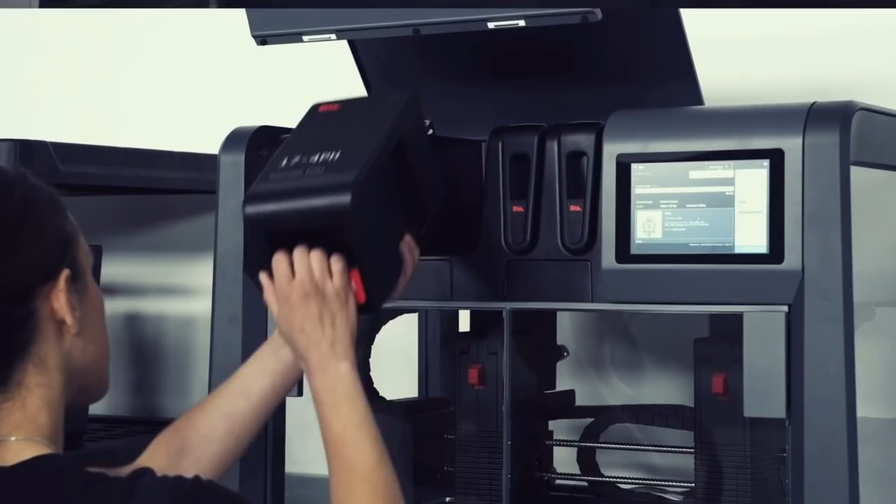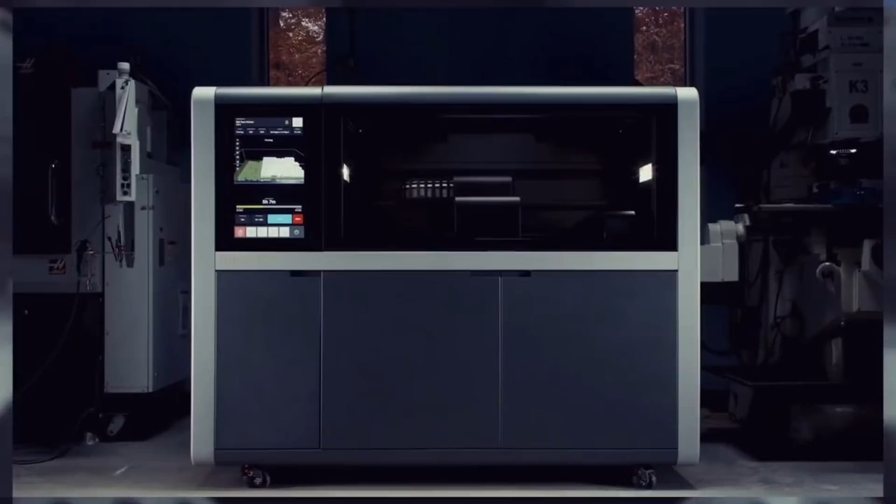In this video, I will be sharing my background research on the metallic 3D printing sector, and then discussing Desktop Metal, a company Chamath Palihapitiya has recently been tweeting about. I want to briefly discuss some of Desktop Metal's main competitors, and put forward some views on why Chamath is backing this stock specifically.

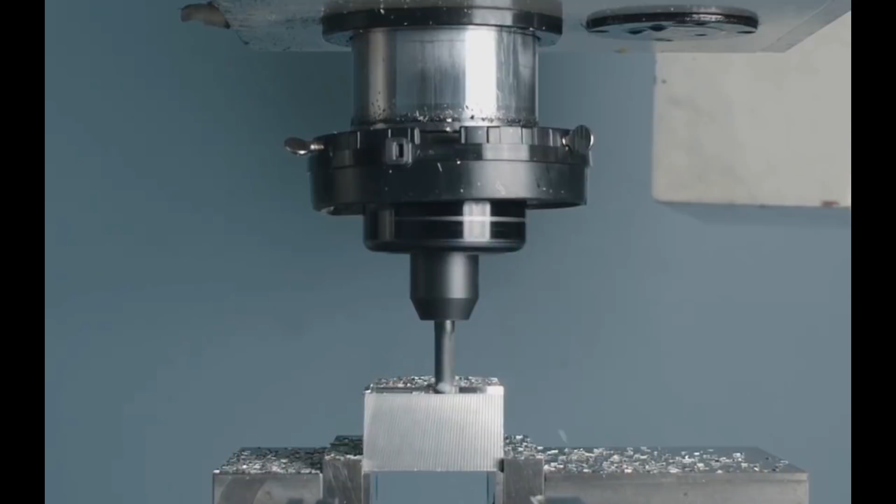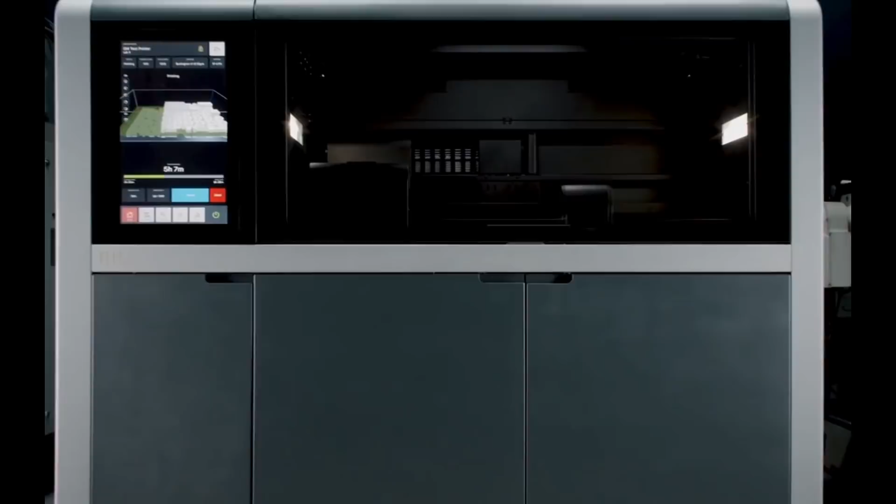Now, I can't understand why this industry isn't being talked about more often. It is pretty clear to me now that we are on the verge of a manufacturing revolution. I think the impact 3D printing will have on the manufacturing sector will be similar in relative scale to the impact electric vehicles are having on the automotive sector.

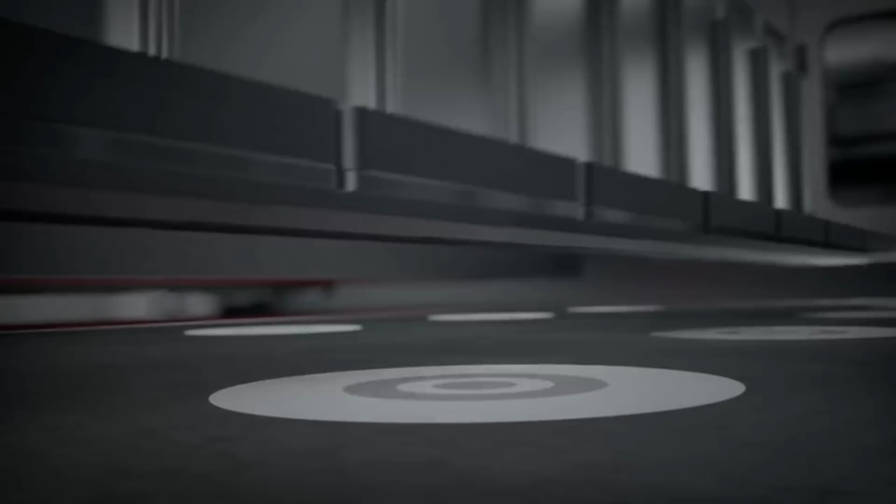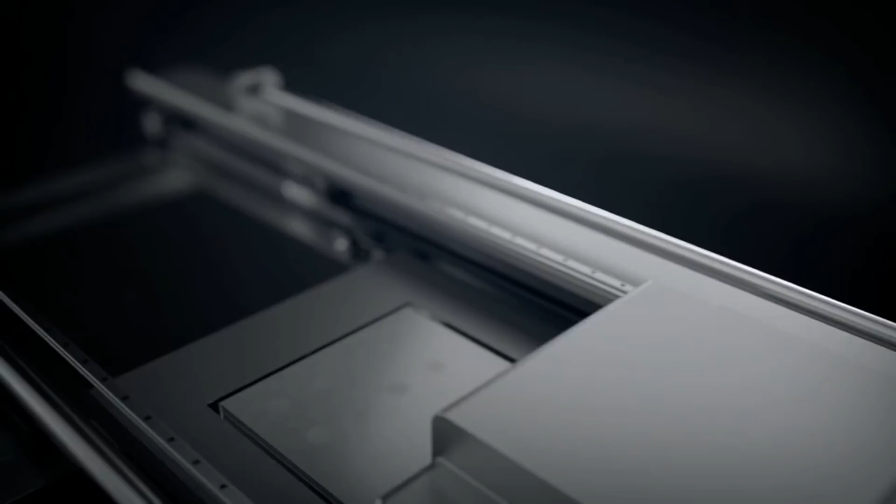The majority of people will have heard of 3D printing, but for those that haven't, 3D printing, or additive manufacturing as it is called in the industry, is the process of constructing an object by depositing material in very thin layers, layer by layer, until the desired shape is formed. The process of additive manufacturing has been around in useful form since the 1980s, and was mainly used for prototyping. Only recently have the machines, or the printers, that produce 3D objects been suitably advanced that additive manufacturing has become a viable option for industry for mass production.

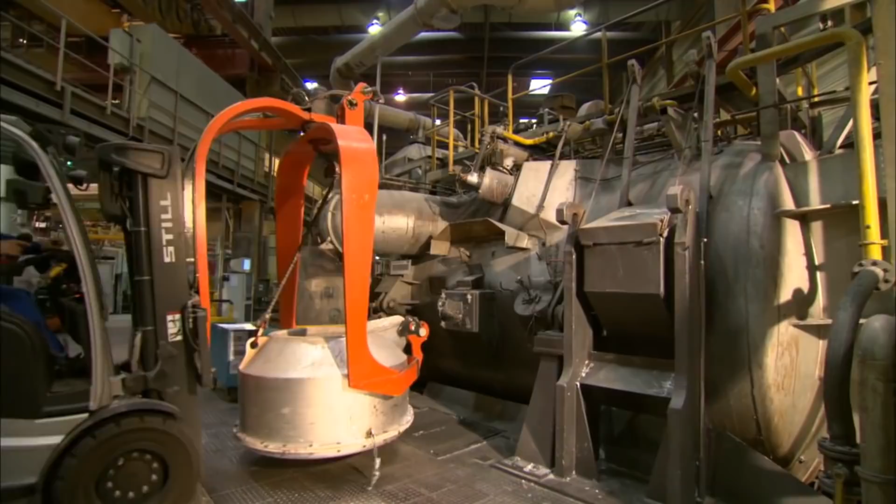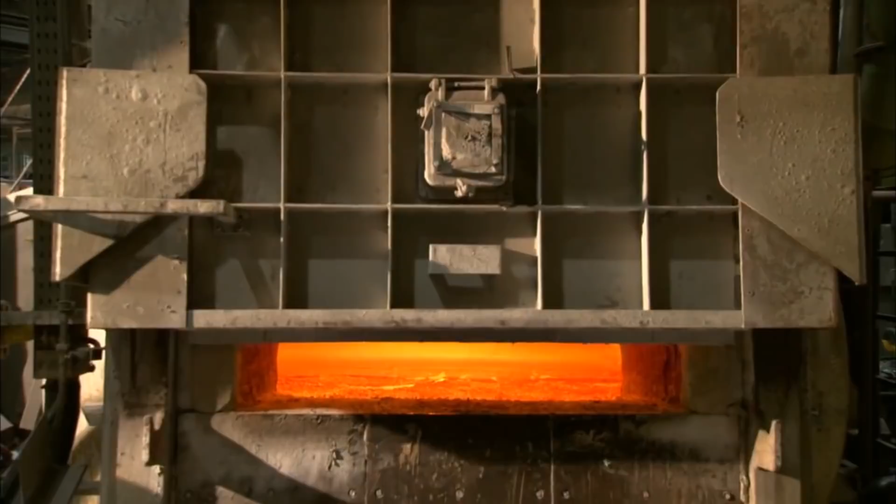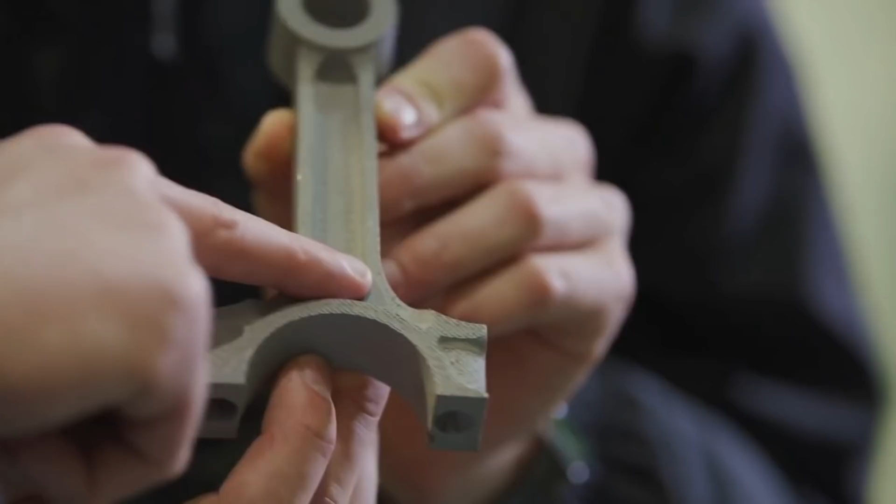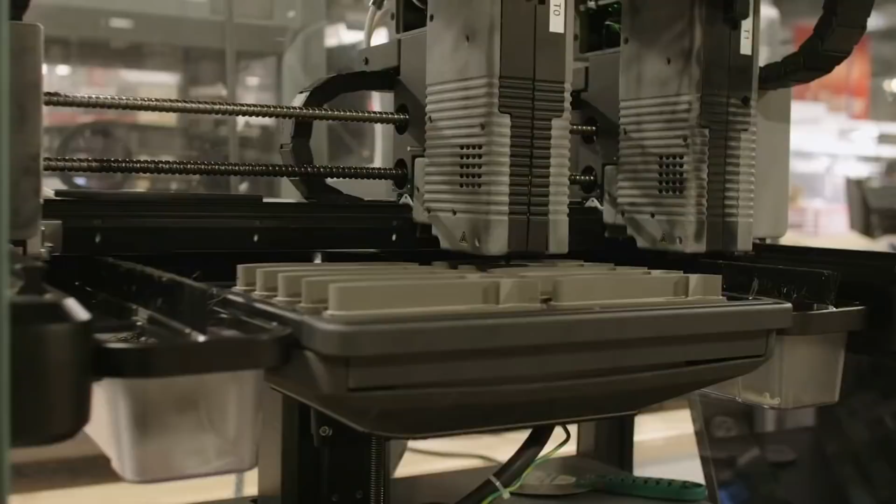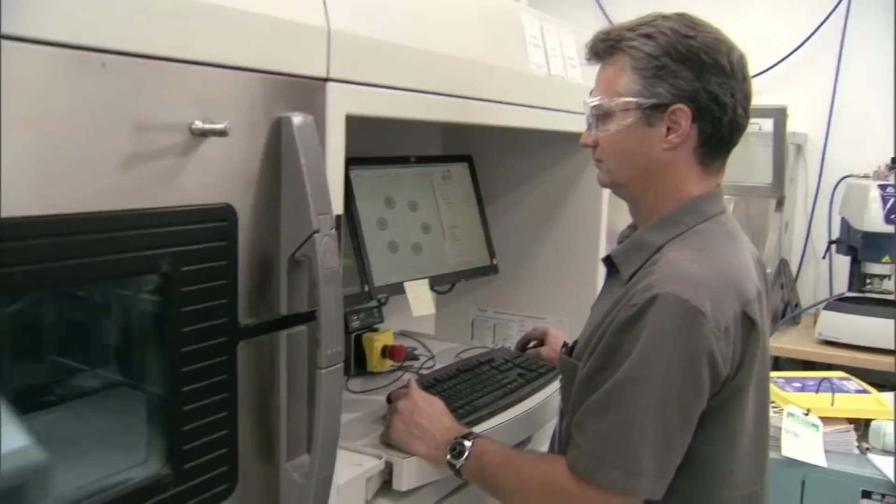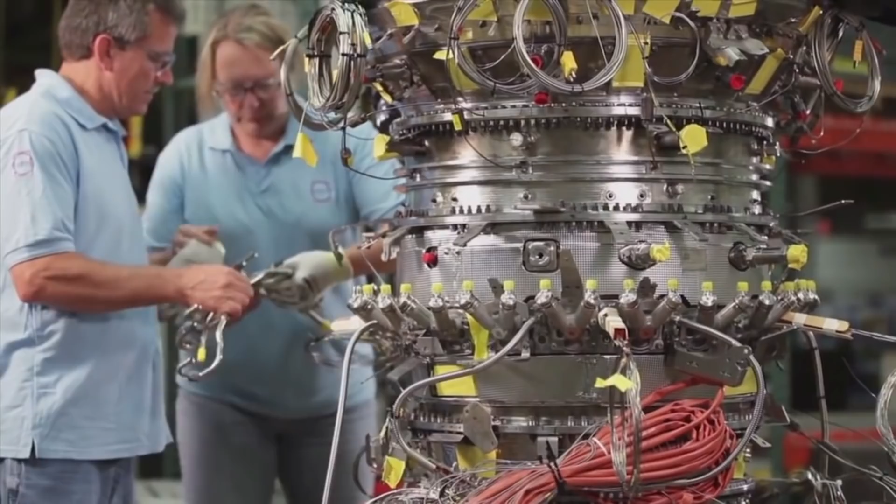This comes in the form of supply chain efficiency by either reducing the number of suppliers or by vertically integrating the suppliers and bringing the process in-house, but it also comes from the ability to combine parts that was previously not possible. A famous example that is widely cited was back in 2016 when GE was able to produce fuel nozzles using additive manufacturing. The process was able to produce the nozzle, reducing the number of parts from 20 down to 1, saving 25% of the weight and reducing the assembly time.

To understand why additive manufacturing is going to revolutionise the industry, it's important to first understand how the parts are currently being made. Simply put, there are two main methods: casting and machining. Casting is where molten metal, usually aluminium, copper, zinc or an alloy, is forced into a steel die or mould that contains a hollow cavity of the desired shape and allowed to cool. The die is then removed and the product is formed. Machining is where you start with a block of metal and cut out the product you want. Machining is often used to shape the moulds used in the casting process.

A key limitation to machining and casting when compared to additive manufacturing is the constraint on the shape that can be made. With machining, a designer is limited to producing a shape that the cutting tool can reach. With casting, the designer is limited again to producing a shape that the molten metal can reach. So a designer needs to consider the manufacturing process when they are producing their designs. A designer may be able to come up with a leaner, more efficient design, but if it can't actually be made, then it's pointless.

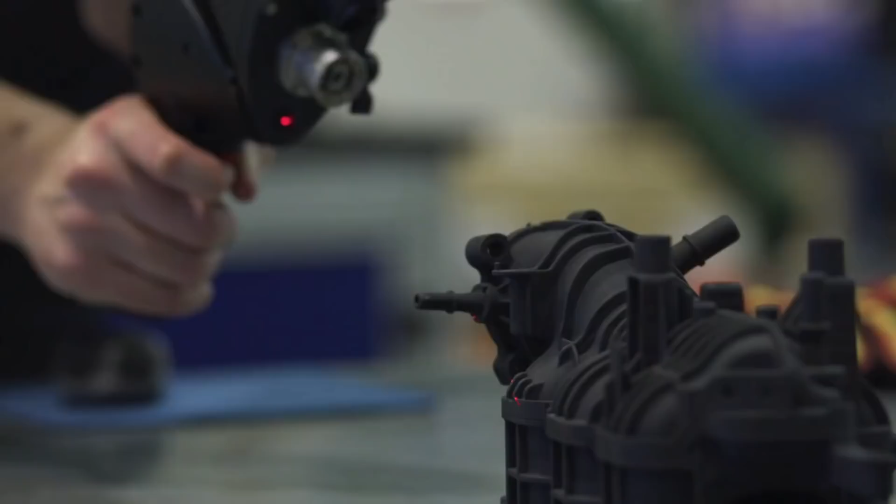So what is so great about additive manufacturing? Well, put simply, it is a transformative approach to industrial production, made possible by the transition from analog to digital processes.

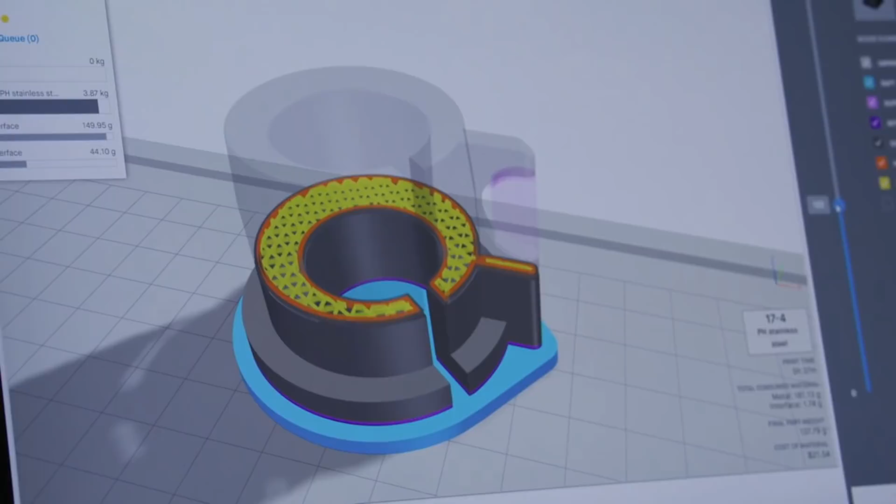It uses computer models to direct hardware, the printer, to deposit material layer upon layer in very accurate shapes. As the name implies, additive manufacturing adds material to build up an object. It is proving to produce cheaper products, provide a more flexible design phase where prototyping and design changing is quicker. It produces a lighter, more lean design and can provide supply chain efficiency.

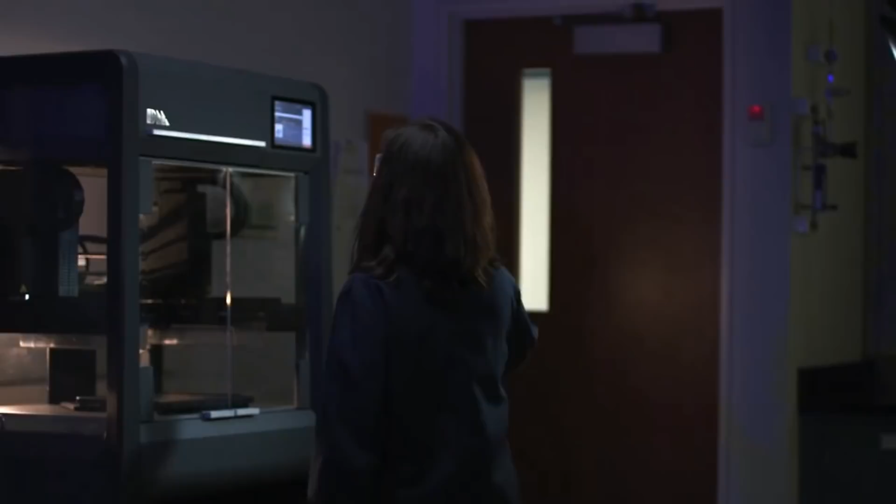Structures can now be produced where material is only deposited where material is needed. Designers are becoming free from the shackles of casting to produce products that were never possible before. And this is one of the main reasons why lighter products are being produced. But another key reason is due to supply chain efficiency.

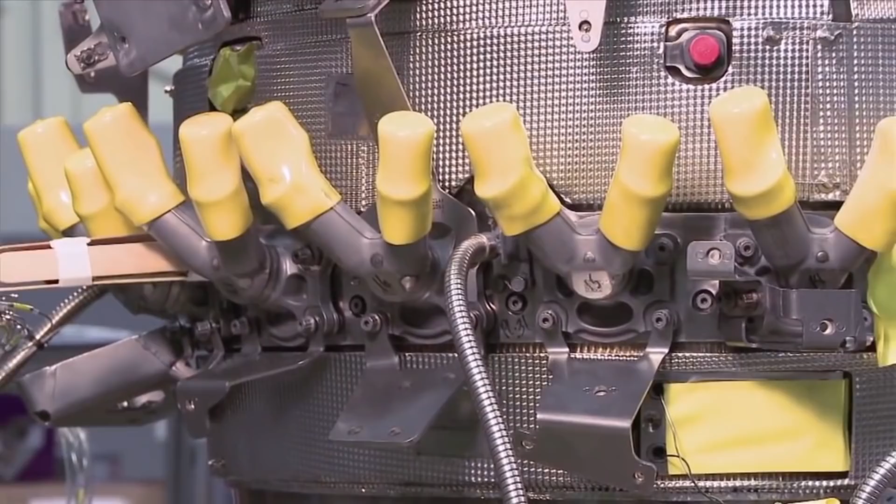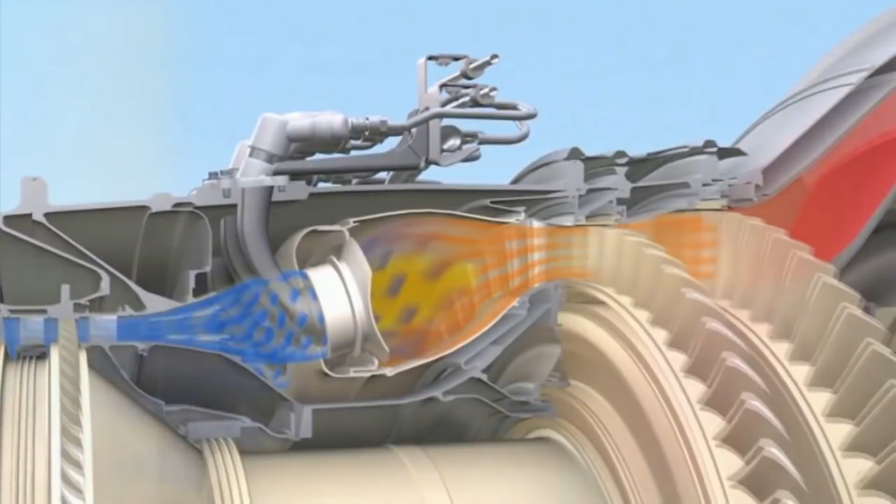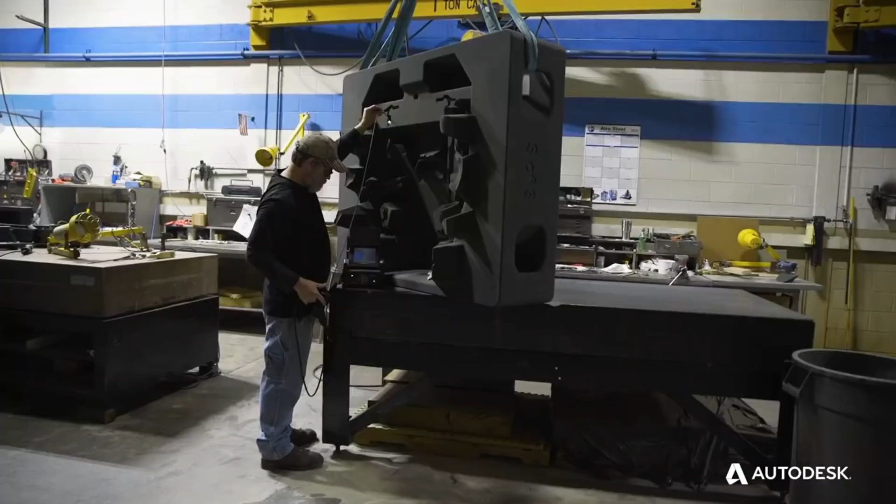The fuel nozzle example mentioned earlier used to require 20 different parts, possibly from different manufacturing companies across the globe. These parts would probably need to travel to another factory to be assembled. To assemble, the part would either be welded or bolted together. All this adds weight, making a product less efficient. 3D printing or additive manufacturing is able to produce these complex shapes in one, reducing the number of connections and thus reducing the weight.

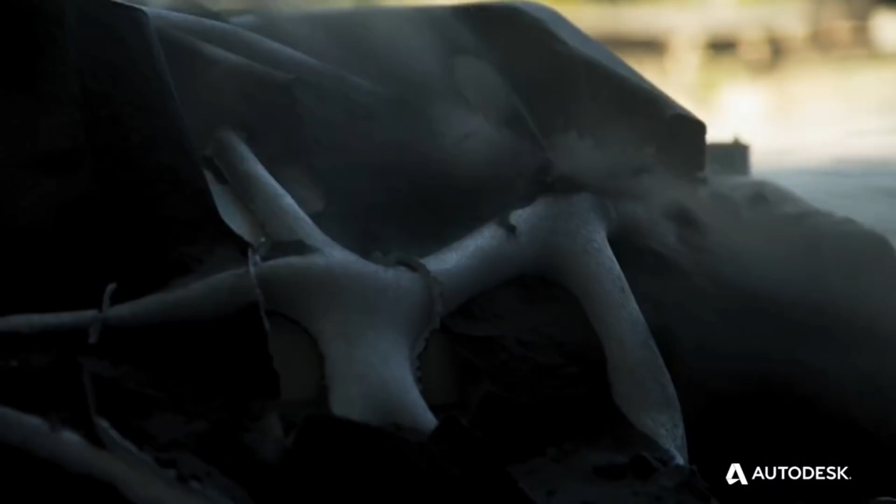And we must now talk about artificial intelligence, because I see this as another key factor for the migration to AM. Artificial intelligence is being integrated into design software packages, further assisting designers in producing designs that are a lot more efficient. It has been suggested that the CAD technicians of tomorrow will be able to produce more efficient designs than the top designers of today, all thanks to AI.

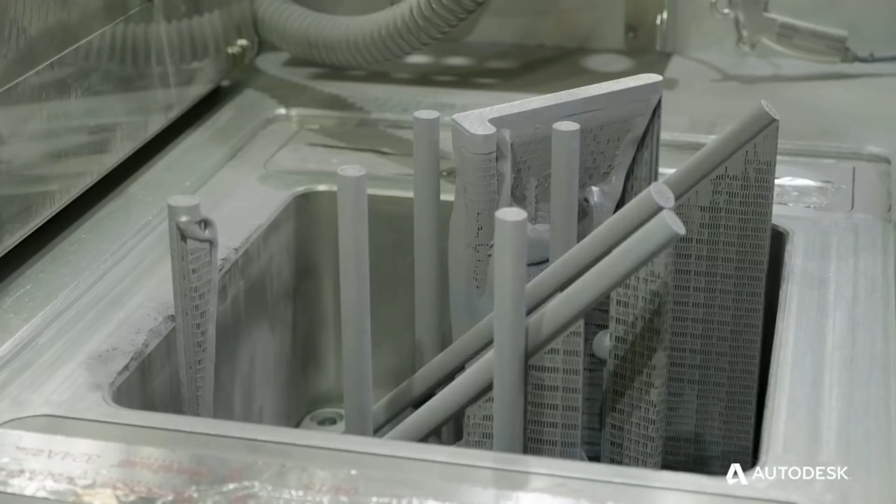We are starting to see products and structures look more like things in nature, like tendons in the human body, and this is because AI is able to determine the most efficient form of a structure, ensuring material is only present where it's needed.

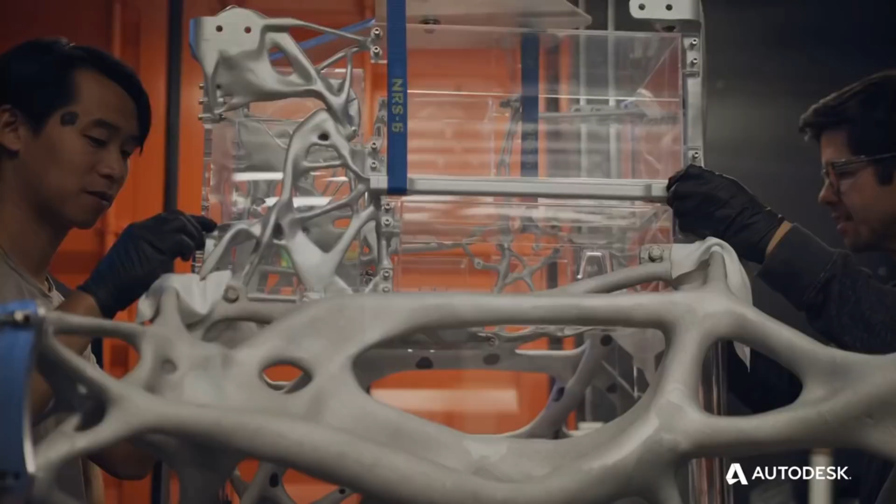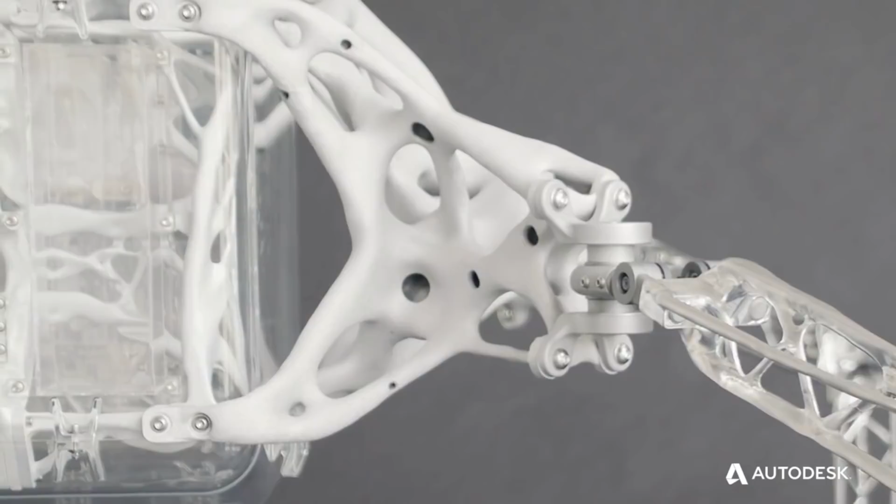Now, it's really important to stress at this point that additive manufacturing isn't going to suddenly make casting and milling redundant. It should be seen as a powerful addition to these existing methods. But as additive manufacturing technology develops, I do believe we will be seeing a significant shift from the traditional methods towards AM.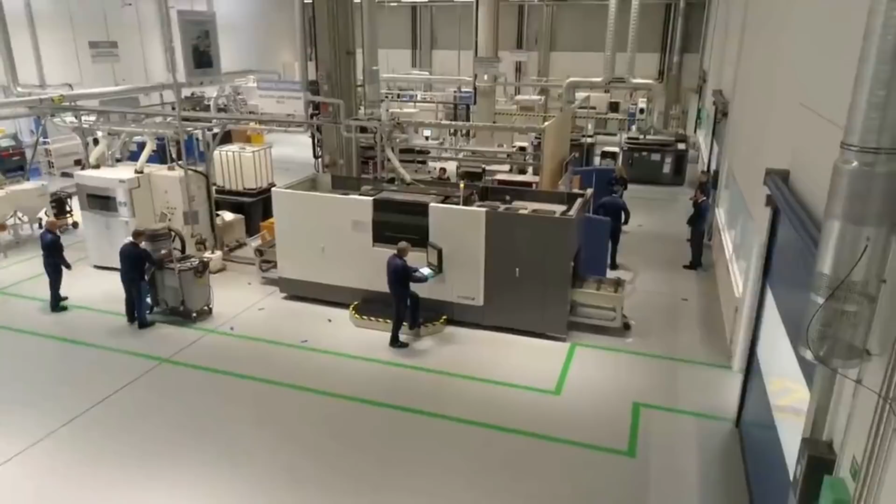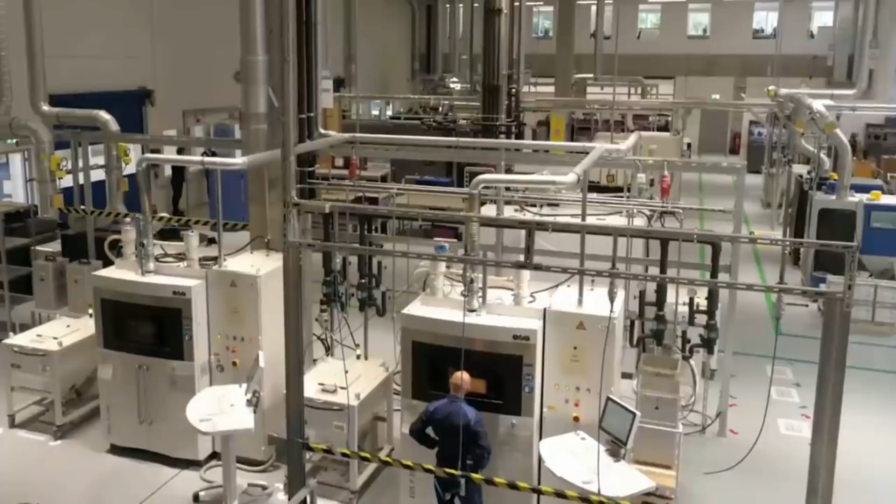Now, there are 7 main types of additive manufacturing methods, and I think it's important to briefly discuss them, as it won't become apparent why Desktop Metal's products are superior if you have nothing to compare them to. The 7 types are laser powder bed fusion, material extrusion, binder jetting, directed energy deposition, material jetting, sheet lamination, and vat polymerization. I only really want to go into detail on the first 3 of these, as they are generally the main ones in the industry.

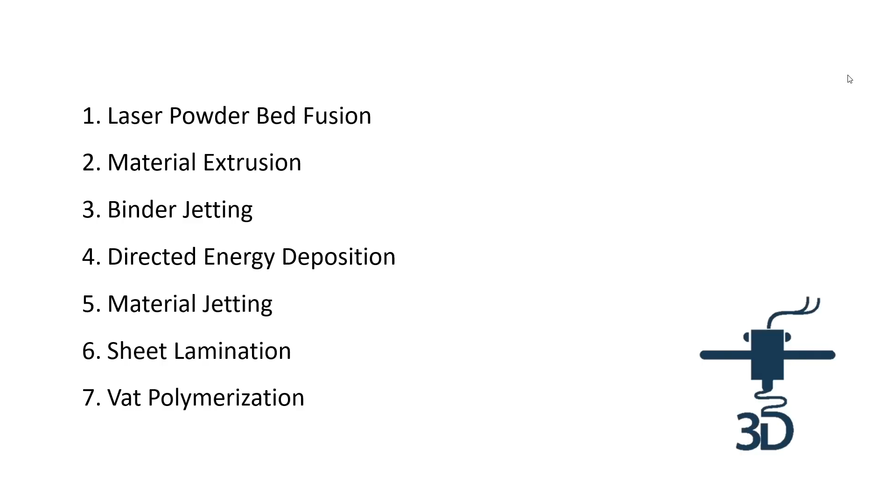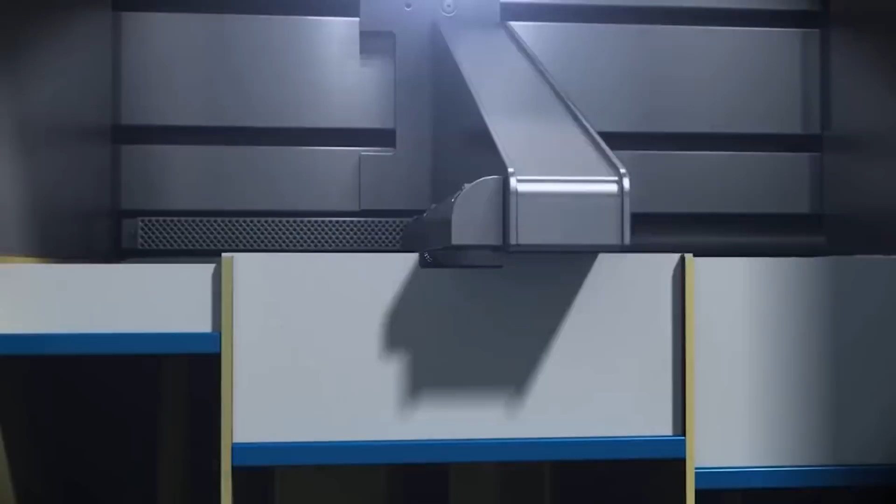So laser powder bed fusion is by far the most widely used method currently, and it involves directing either a laser or electron beam to melt and fuse metal powder together. Once the first layer has been melted and fused together, another layer of loose metal powder is added, and the laser starts up again, adding to the next layer.

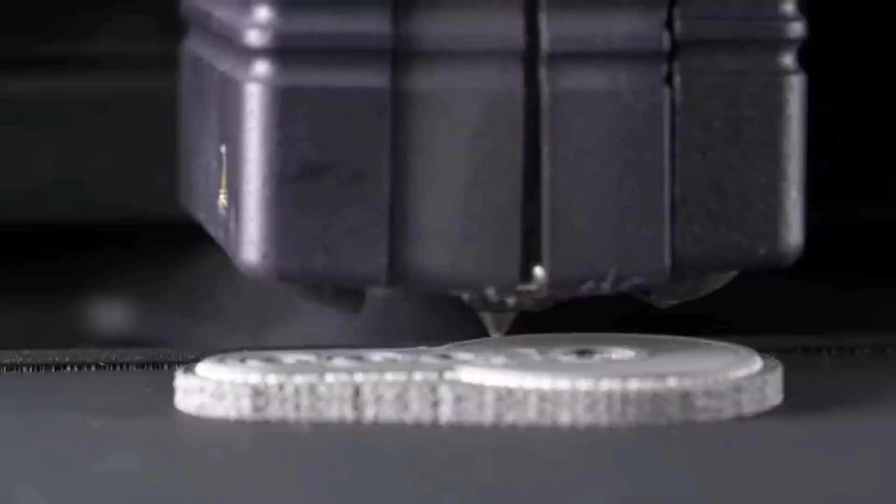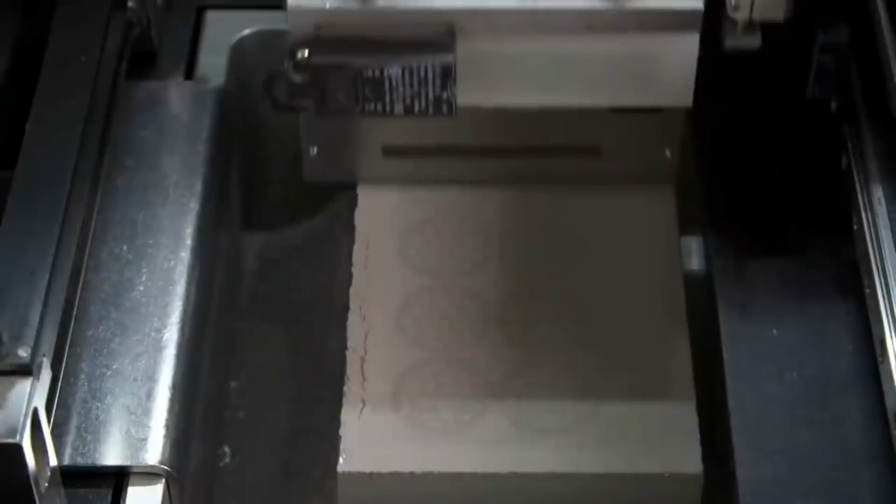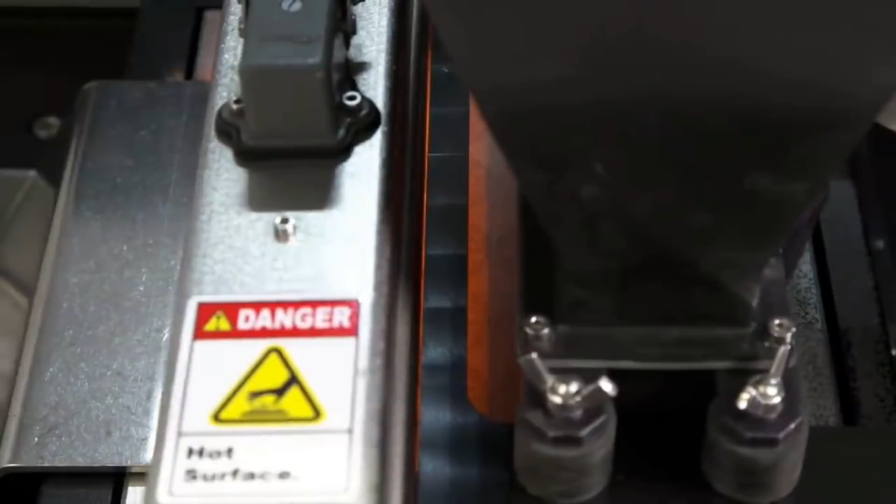Material extrusion is where metal is drawn through a nozzle, heated, and is then deposited layer by layer. The nozzle moves horizontally, and the platform moves up and down vertically after each layer is deposited. And binder jetting is similar to the standard inkjet printers we know today. A printer head moves from left to right, depositing 2 materials, a metal powder and a binder. Once a layer is added, it's dried, the object is lowered, and the next layer is added on top.

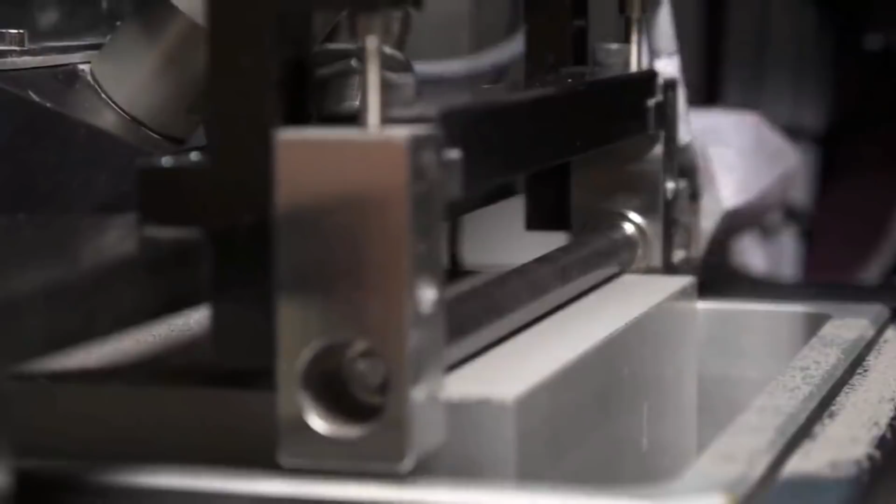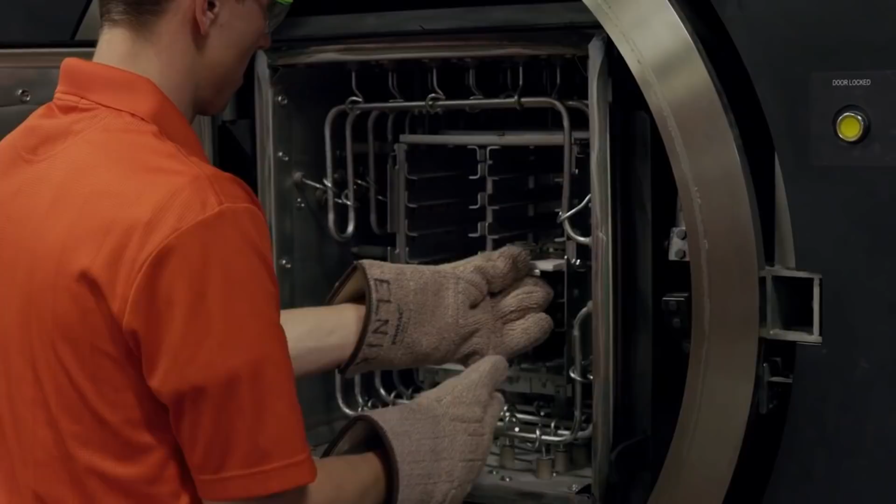Once the object is printed, a couple of post-processing steps are required. The first is the curing stage, which increases the strength of the part so it isn't destroyed in the next stage, called sintering. After curing, the part will be highly porous, and the metal part is relatively weak. Sintering is where the part is placed in a furnace and heated for approximately 24 hours until the binder is melted away and the metal is fused together.

Now, I don't want to go into too much detail on the pros and cons of each system, but there are 2 key points I do want to make. Binder jetting is fast, way faster than laser powder bed fusion and metal extrusion. With binder jetting, each layer can be printed with rapid speed, just like a sheet of paper, whereas with laser or extrusion, you are constrained by the single laser or nozzle head, and the speed is much, much slower.

Now, binder jetting may be much faster, but it does require the sintering process, which takes time. Currently, I see this as one of the bigger constraints to binder jetting, but with the rate of innovation, I think we will see this become more and more efficient and less of an issue.

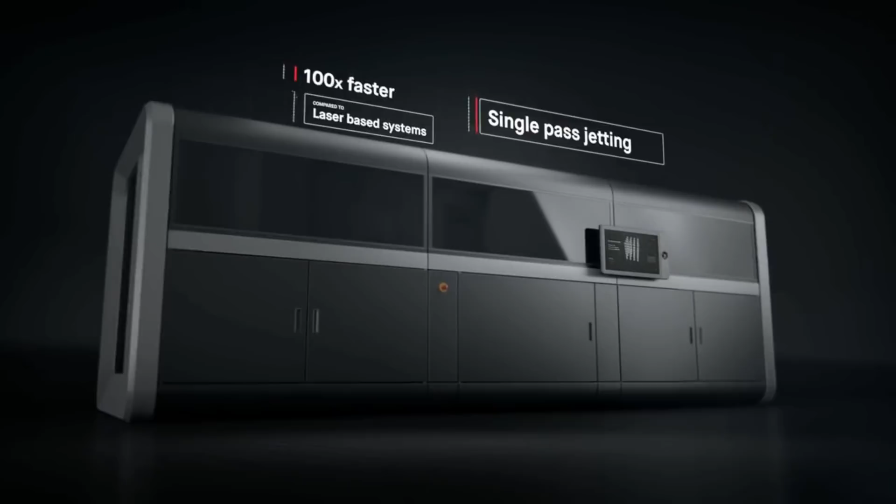Desktop Metal have selected the binder jetting method for their production system. They say it is over 100 times faster than that of a laser-based system, finally bringing down the cost by significantly increasing productivity.

So who is Desktop Metal? Well, it's a company founded in 2015 by leaders in advanced manufacturing, metallurgy and robotics to make 3D printing accessible for all engineers, designers and manufacturers.

On the 10th of December 2020, DM went public through a SPAC, and the deal valued DM at $2.5 billion US. The transaction provided up to $575 million in gross proceeds, comprised of the SPAC's $300 million of cash and a $275 million US fully committed common stock PIPE, which Chamath said he led.

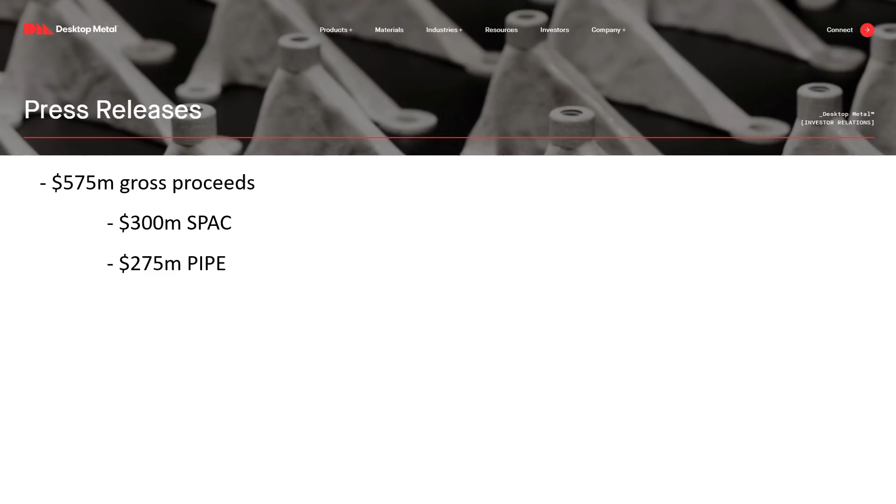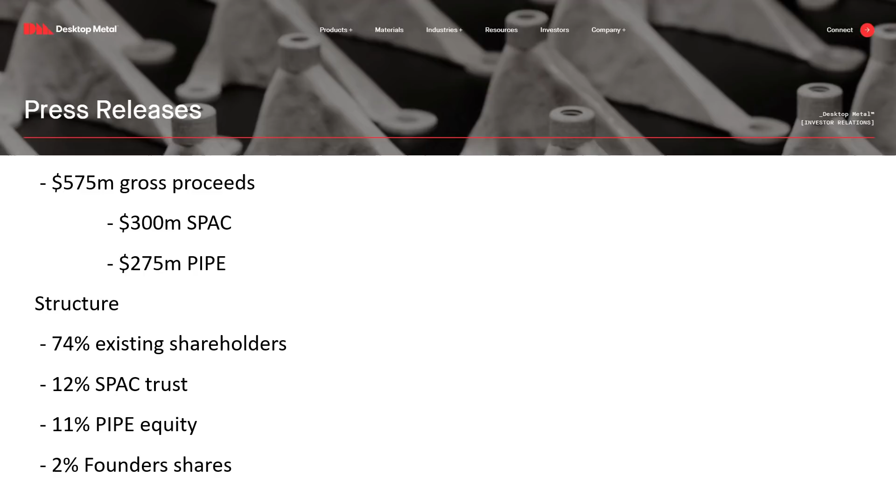Existing shareholders will retain 74% of the company, with the SPAC's trust shares holding 12%, PIPE equity at 11%, and founder shares at 2%. DM has produced 4 main products. The Fiber, the Shop and the Studio systems are now all released, with the Production system due for release in the second half of 2021.

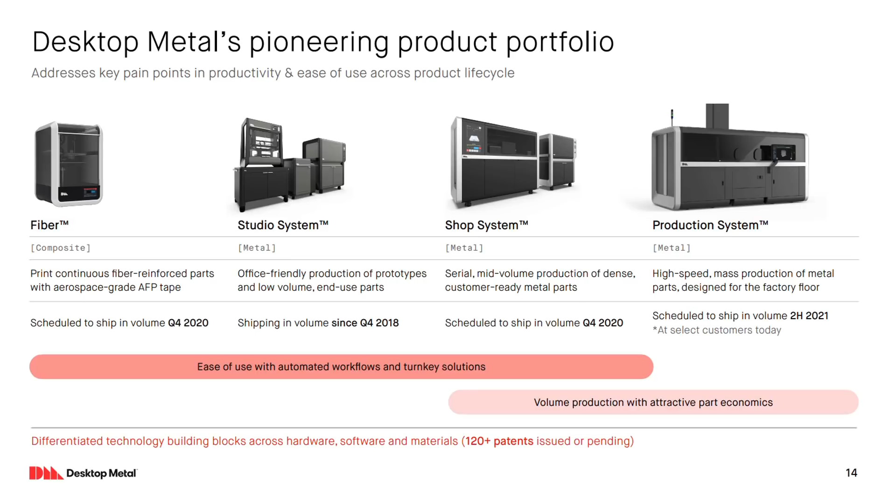The Production system is the most exciting and is really the first 3D printing system for mass production. Like the Shop system, it uses a single-pass jetting technology, which makes it the fastest printing system in the world, delivering that 100x efficiency mentioned earlier. It produces excellent quality, competitive costs, repeatability, and supports a wide range of metals.

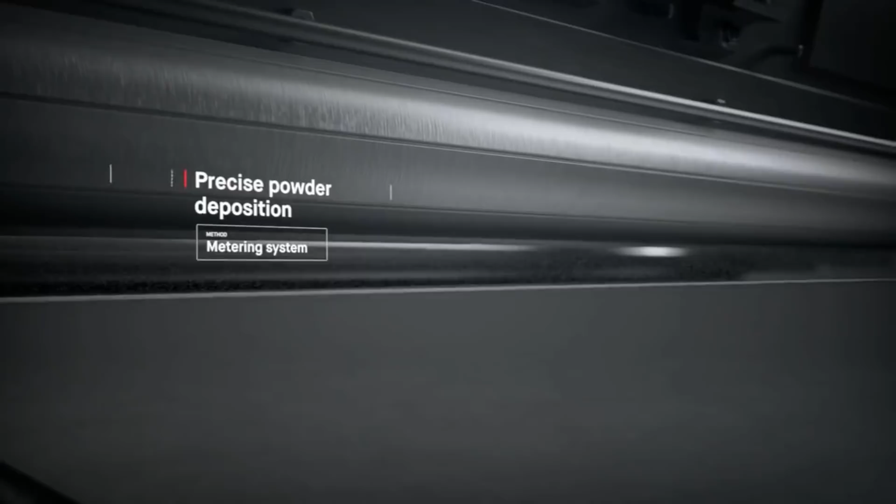For me, the takeaway here is that DM has now produced a product that provides better value than the traditional methods for certain applications. Their single-pass jetting technique is industry-leading, and I can see this company innovating quickly. And bearing in mind that the 3D printing sector has barely scratched the surface of what the sector believes is possible, this machine is very exciting and a key stepping stone to future revenue streams.

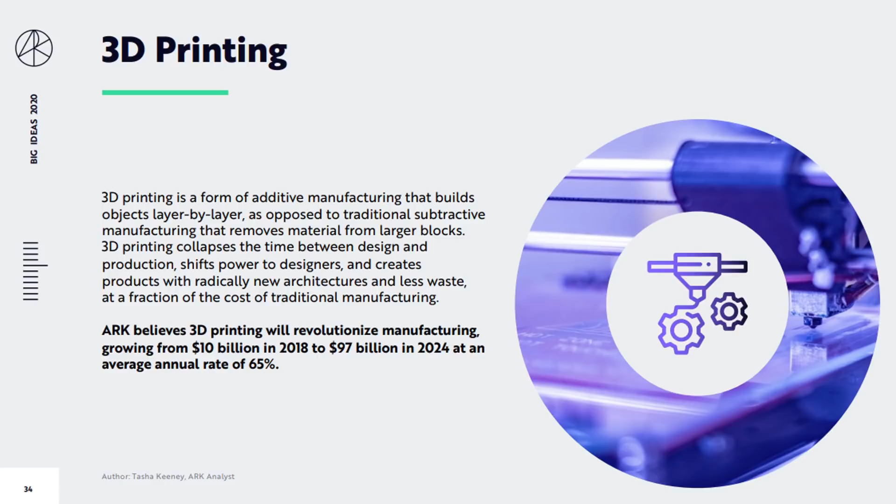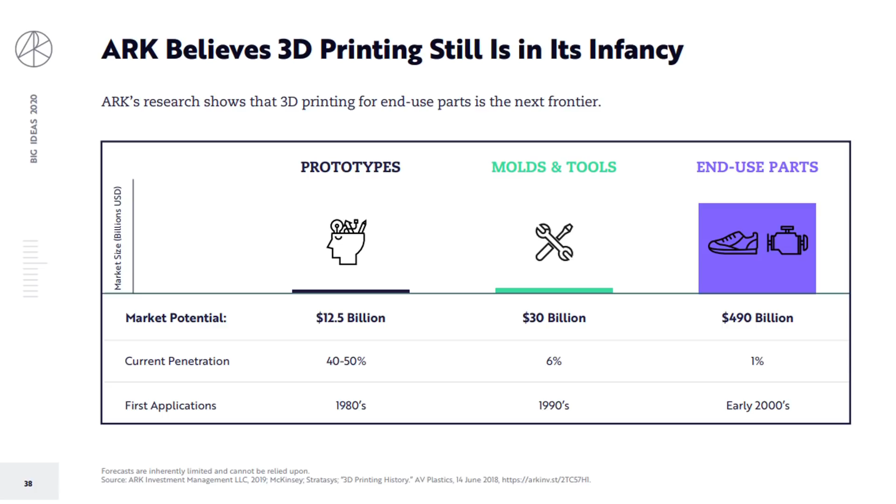ARK Invest believes that additive manufacturing is still in its infancy. Here we can see that AM is fairly well established in the prototyping sector, achieving a 40 to 50% market penetration. However, the real money is in the end-use parts, where ARK estimates that there is $490 billion US market potential. AM is currently only penetrating 1% of this. ARK's research also suggests that AM will grow to a $97 billion industry by 2024. That's an annual rate of growth of 65%.

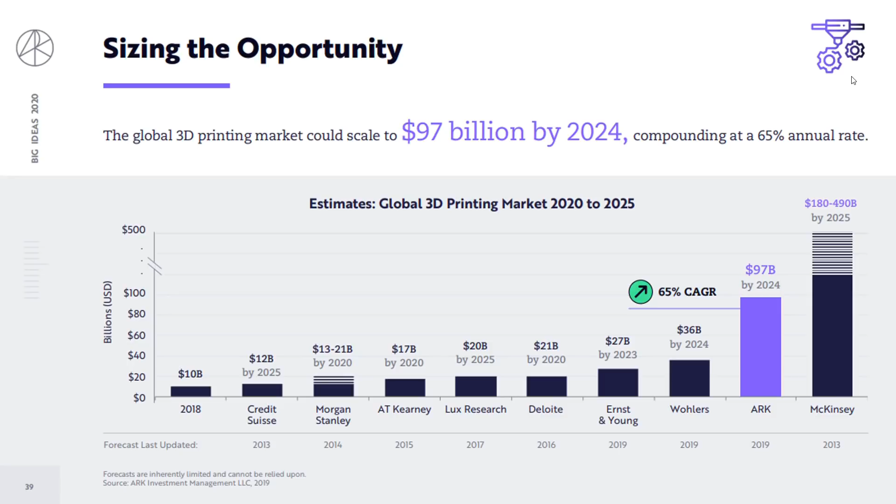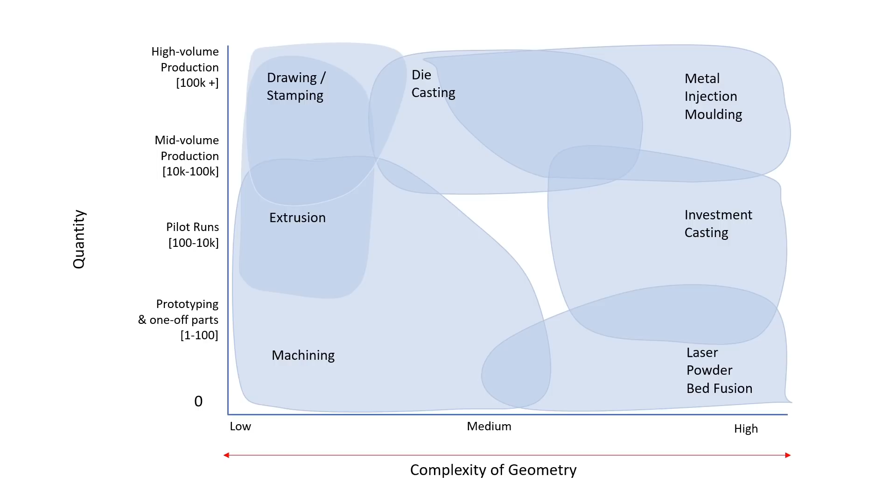This chart shows a plot of existing technologies, with geometry complexity on the x-axis and quantity on the y-axis. The plot bubbles show a comparison of traditional manufacturing techniques and laser powder bed fusion as an example. Now, overlaid is how Desktop Metal's products will compete and disrupt this whole sector. Desktop Metal is very well positioned to lead this industry.

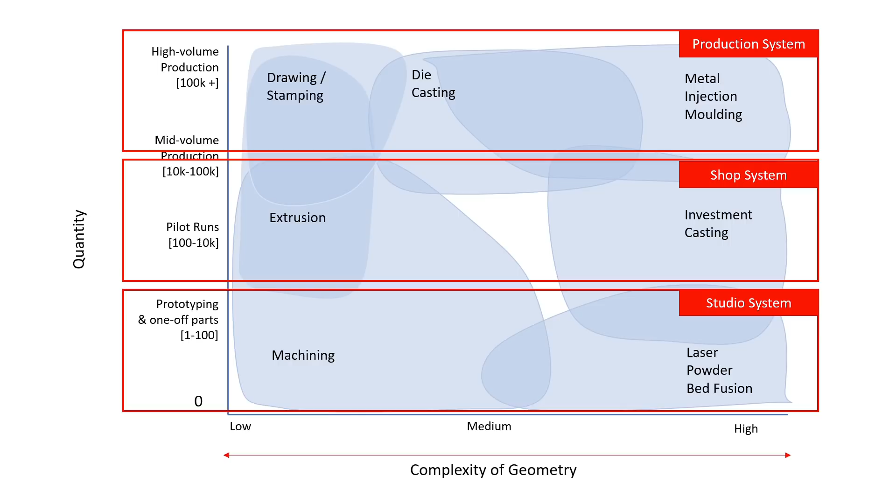They expect the AM market to grow 11x over the next decade, and their first 3 products are already on sale, with a production system due for release in the second half of this year. Their products are very energy efficient, plug and play, and they provide almost zero waste in the printing process. As such, DM have positioned themselves very nicely to take this sector growth in their stride.

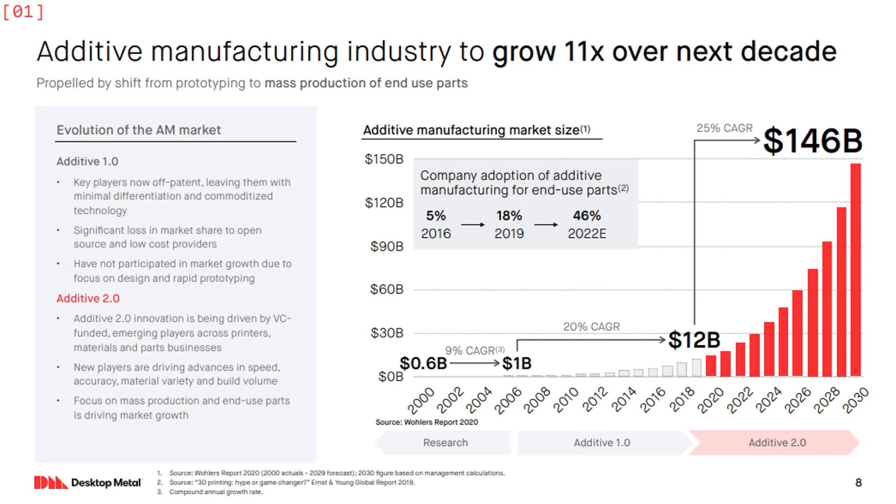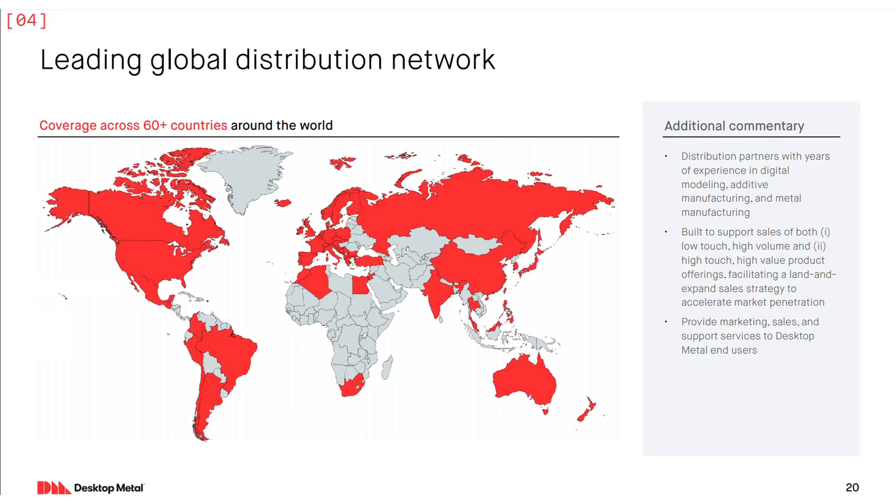Another key reason that they are well positioned is they already have a global distribution network in over 60 countries, and their customers are all in the main sectors from automotive and aerospace to heavy industry. In an interview last year, their CEO stated that they're exceedingly happy that their customer base is very horizontal and that no customer accounts for more than 10% of their revenue.

The leadership of DM is talented and is founder-led, headed by Ric Fulop. Ric is a serial entrepreneur who is the founder of 6 technology companies. And Forbes has called Ely Sachs, co-founder and technical fellow, the living embodiment of 3D printing. Many of the team are engineers, and more than 25 employees hold PhDs relevant to this sector.

Now touching on the financials, and this is year-end 2019. The company achieved $26.4 million in revenue, and they expect this to increase to $941 million by 2025. Now this seems ambitious. Currently, approximately 86% of revenue comes from studio systems with consumables and 14% from software and support services. It's going to be interesting to see what the revenue percentage is for the production system when we get the interim results this year.

To note, 89% of revenue is generated in North America, and key customers include BMW and Ford, who have both provided investment into Desktop Metal, but also Google, the US military, Lockheed Martin and Bosch. The company made a loss of $121 million, but are expected to make a profit of $508 million by 2025. The company has $625 million in cash and $9.9 million in debt.

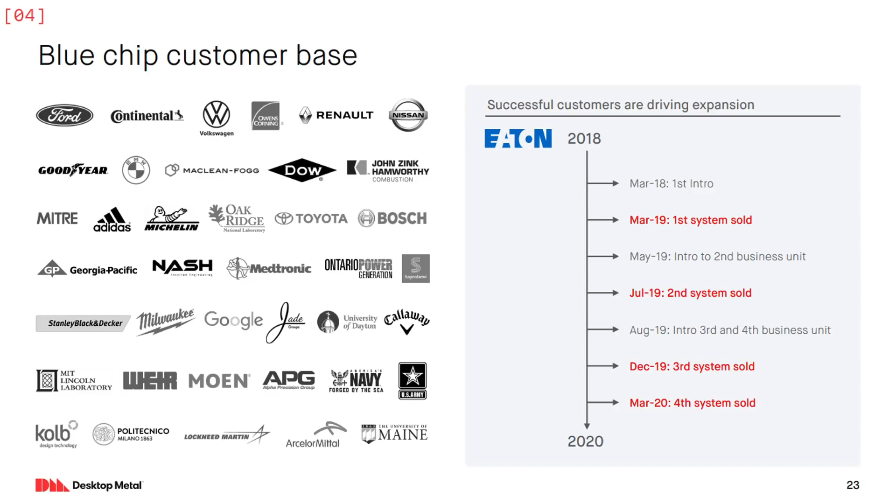So, would I invest in Desktop Metal? Time to pull out the 3 questions. Is this really addressing a fundamental human need? I think it absolutely is. Additive manufacturing is able to facilitate leaner designs, decrease cost, reduce weight, reduce waste, and shorten the time to production. As such, AM provides a more sustainable method of manufacturing and opening manufacturing up to the masses.

Could this be used by 1 billion people in 30 years' time? Absolutely. I'm confident that in 30 years' time, a large proportion of the human population that buys a manufactured item will find that the majority of that item will have been 3D printed. And Desktop Metal is currently positioned very nicely in this sector.

And is there somebody really special here? Well, there is a highly qualified team led by some of the leaders in the industry, and most with an engineering and manufacturing background, backed by legendary investors. This is a strong hand.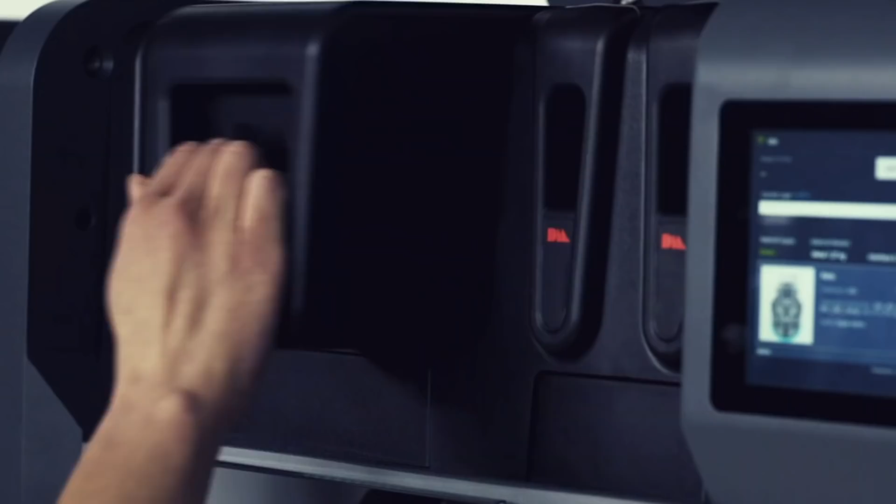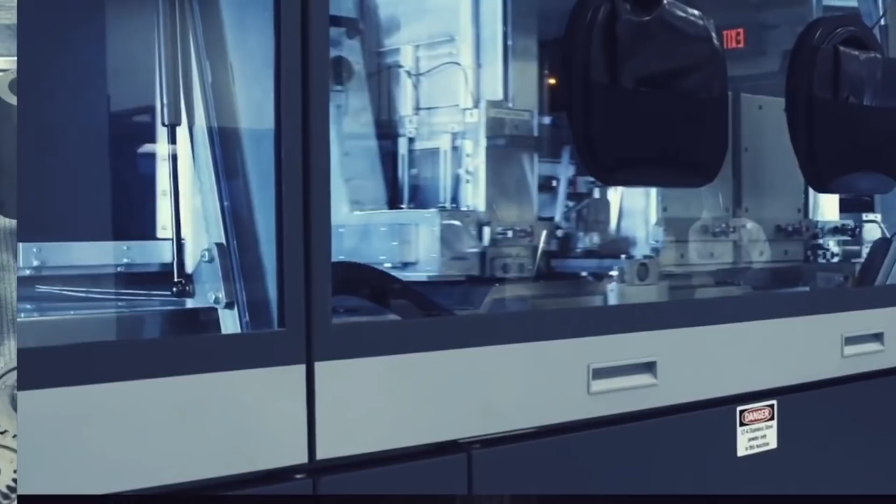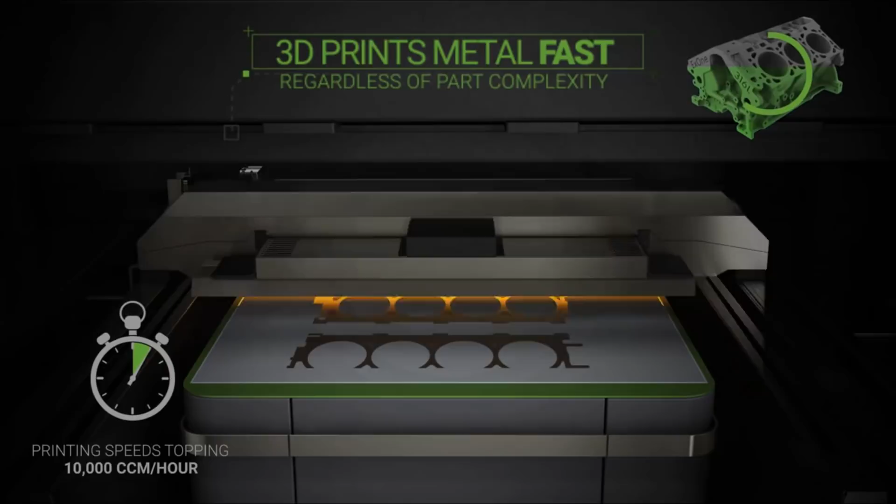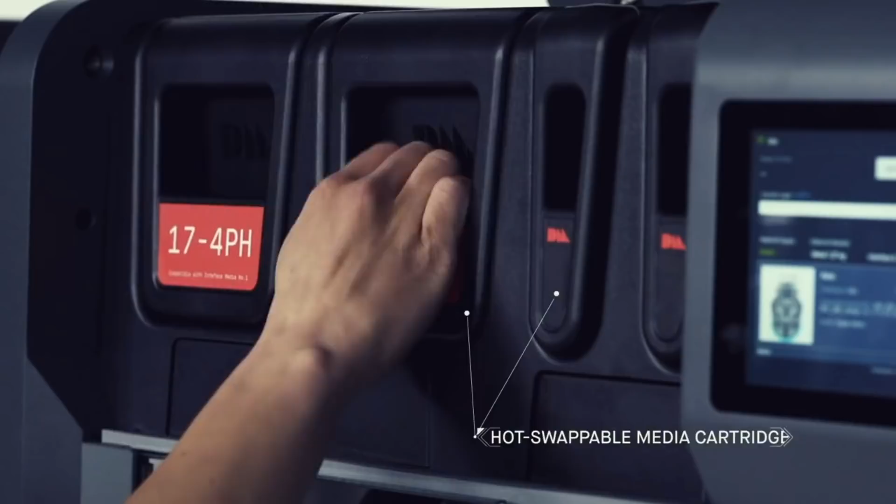ExOne is worth touching upon in a bit more detail. They, for a time, had the fastest printing system on the market, and they have a history of experience, and their latest model is the 10th iteration. This should not be dismissed. I also think that their revenue projections are ambitious, but Chamath has included their revenue predictions in his one-pager, so I'm going to trust him on this one.

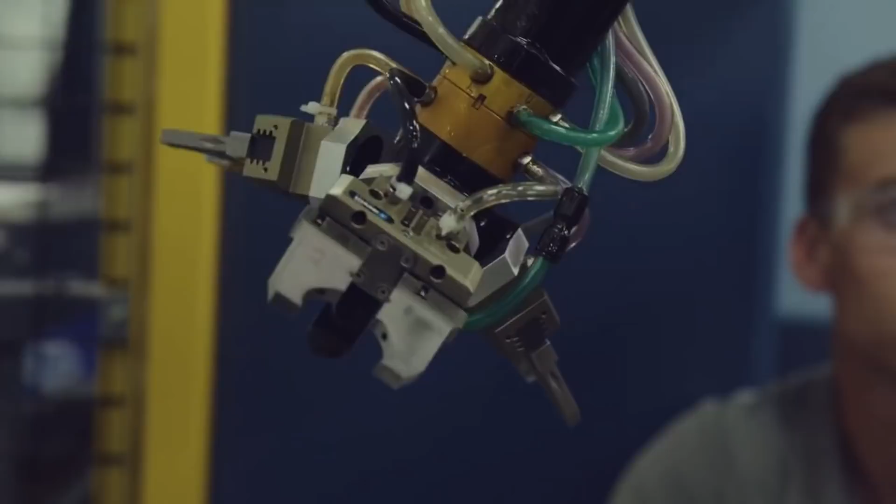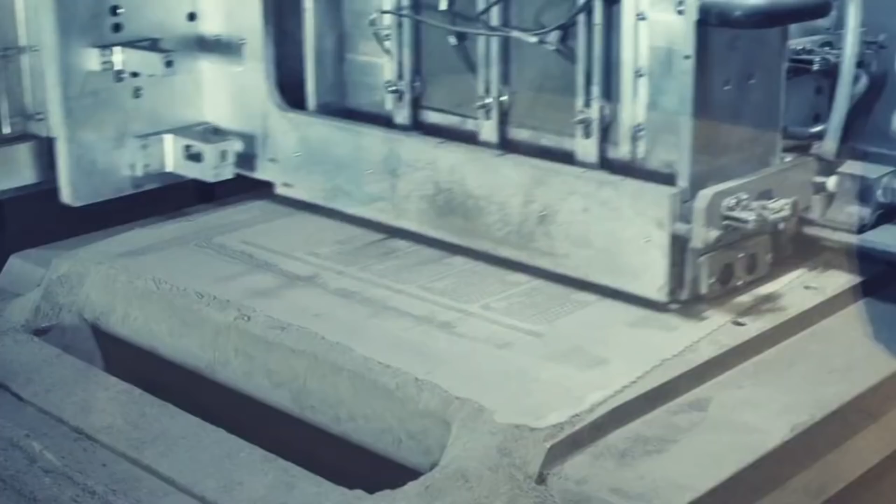And finally, DM's production system is the first iteration of this size printer for them. It looks fantastic, don't get me wrong, and although the people at DM have fantastic experience, it is a relatively new company and the first iteration of this size product on the market. This can also be a positive, so let's see.

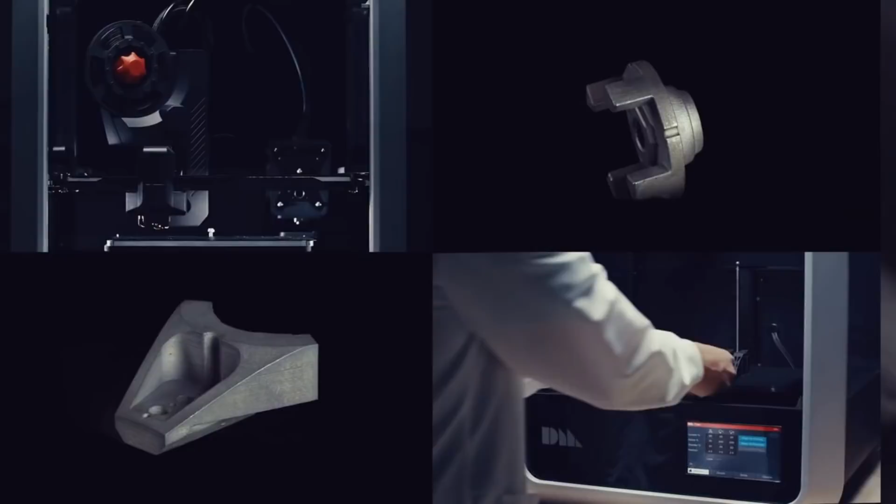Now, I have a position in Desktop Metal. I think this is a relatively safe, long-term investment. They currently have cash, and it is widely rumoured that they are eyeing up competitors for acquisitions. The share price today is approximately $20, and I'm looking forward to rewatching this in a few months' time to see if my thoughts have changed and to see how the stock price is trending.

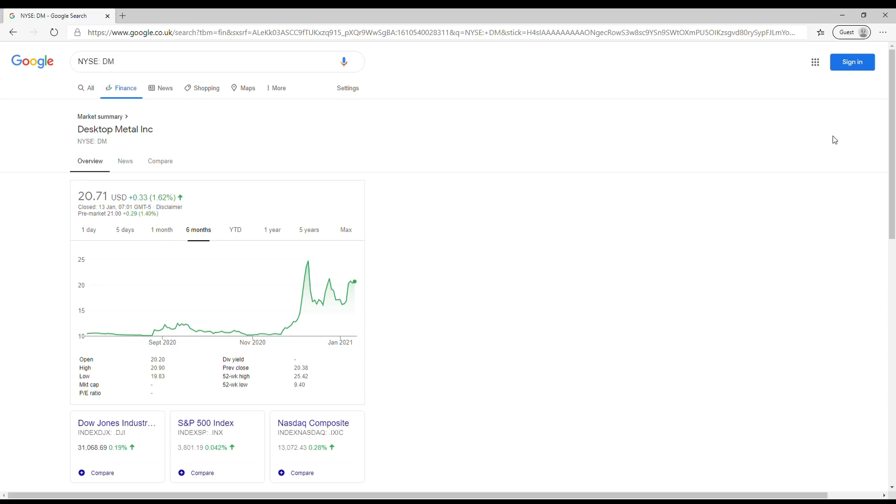I should also mention that for those that prefer to invest in an ETF, ARK Invest have a specific ETF for 3D printing, worth checking out. Surprisingly to me, Desktop Metal isn't included in this, and I really can't understand why.

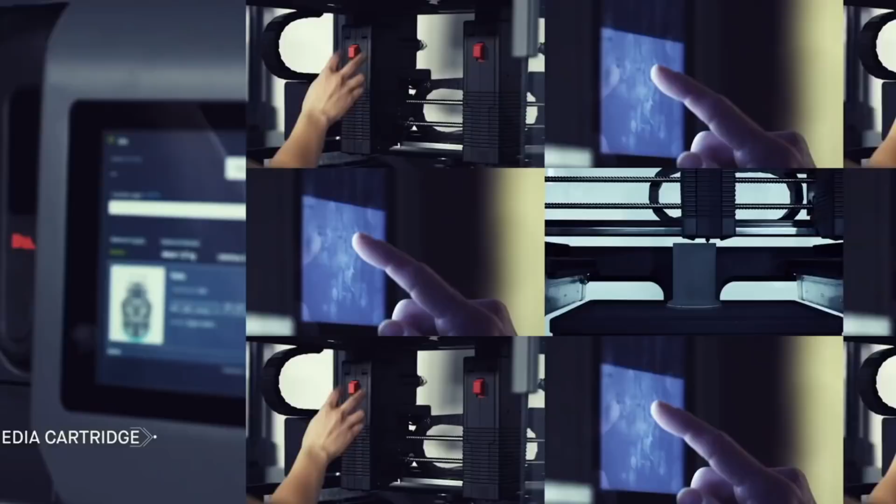And a huge point I forgot to mention earlier, and this actually may be one of the biggest points for the sector. Saving the best till last, I guess. No tariffs. Designs can be sent across the world for free and printed in the country of assembly. This in itself is just so important to factor into the future viability of the sector.

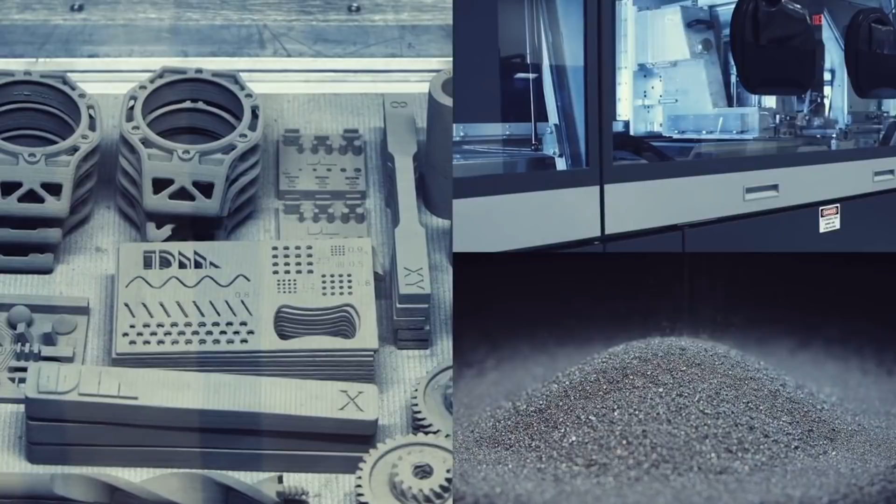Now, I appreciate this video was a bit longer than the others, and I didn't set out to make it this long, but felt it was necessary to cover this in detail. But this really only scratches the surface of the sector, and I have very much simplified some areas.